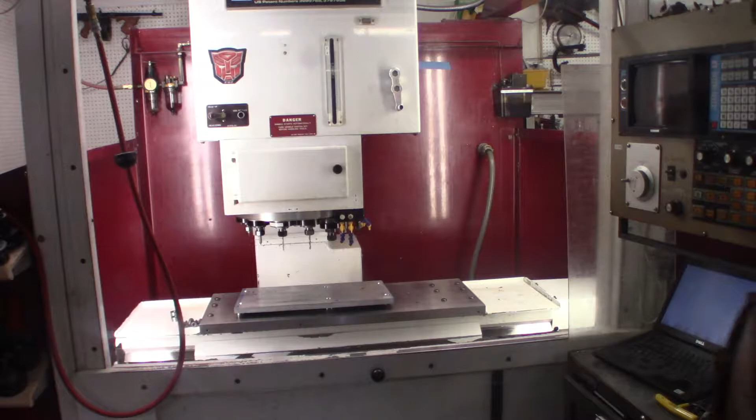Today I'm going to get started on a project that's really just something I've wanted to do to push my machining capabilities and skills. This is one of the tool holders for the Acroloc, and part of how it functions, there's a top ring, and then the actual tool holder is the rest of it. These rings, I've got somewhere around 15 or 16 of them total. 12 sit in the machine at all times, and the rest I swap out as I need them. What I'd like is significantly more of these rings, so that's what I'm going to try to build today. Let's head over to the bench and have a look.

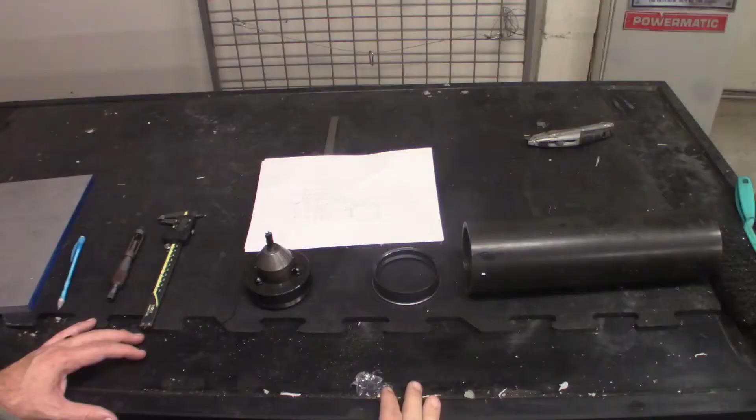Okay, so we've had at least a few days of mildly unpleasant warm weather, just getting a little over 100. The air conditioning in the shop has actually been doing enough that I'm not dripping sweat within 10 minutes. So I'm going to go ahead and start going over a project I've been wanting to do.

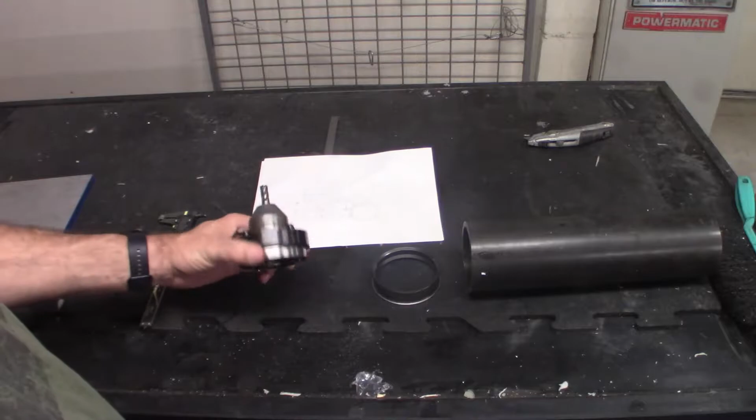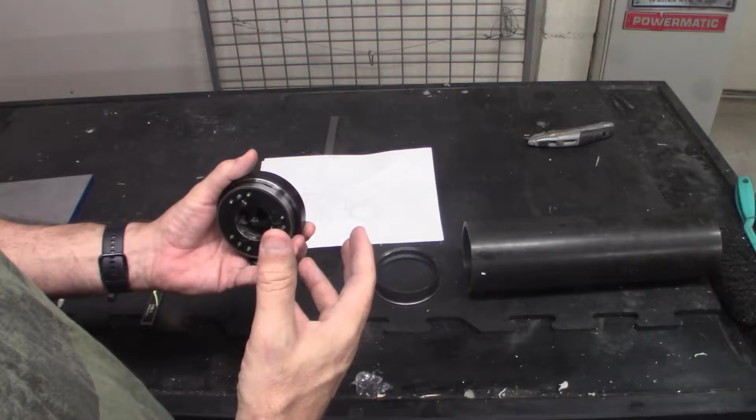So in the Acroloc, these are the tool holders. It's got its own custom tool holder, which has a lot of its own problems, but it's actually designed with the automatic tool changer in mind and the way they hold everything in. Each of the tool holders snaps into the spindle and comes down to do any of the cutting.

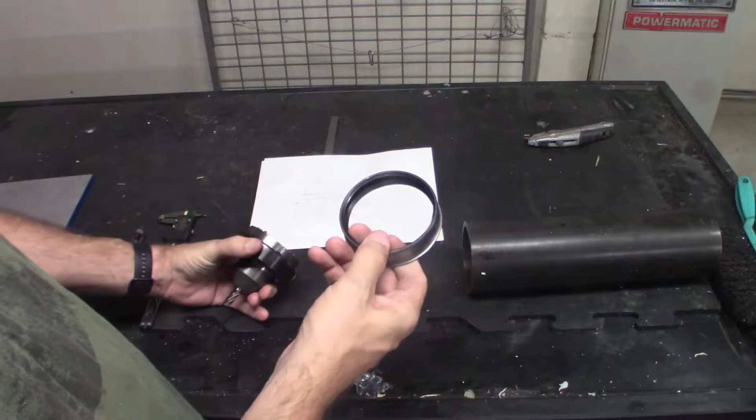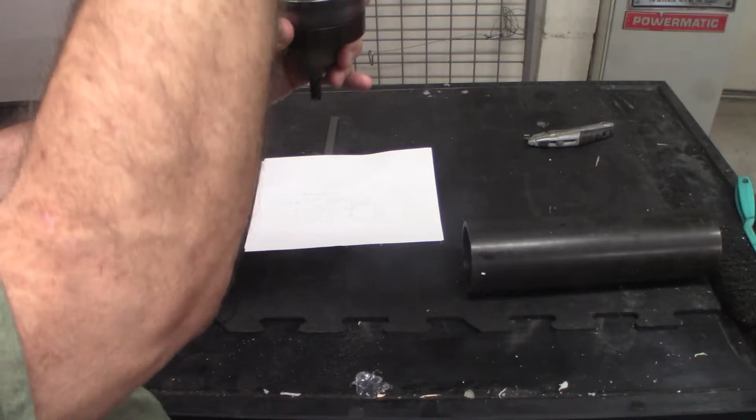So this piece is actually what holds it in the automatic tool changer as a ring, and it basically goes on here, and it has a little lip that holds it in so that the spindle can come down, hit it, and then it pops out, comes back up, pulls it off the spindle, and then it can change to the next one.

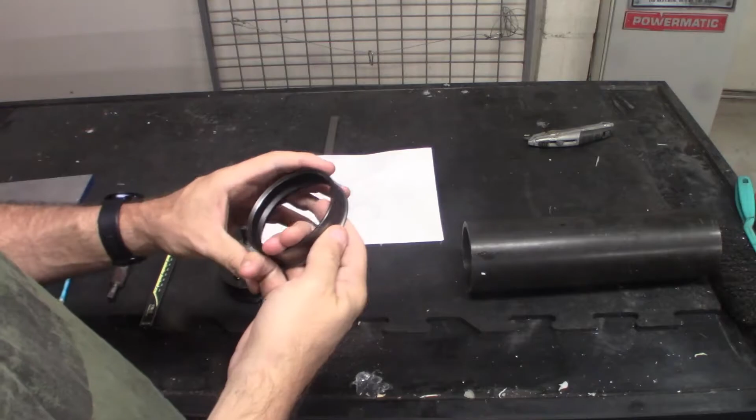So these rings, I do technically have enough of them, and as I need new tools I can pull them off. The tool changer has room for 12 tools. I have, I think, 15 or 16 of them, so I have a couple of extras I can swap out between tools, but they kind of look like an interesting project.

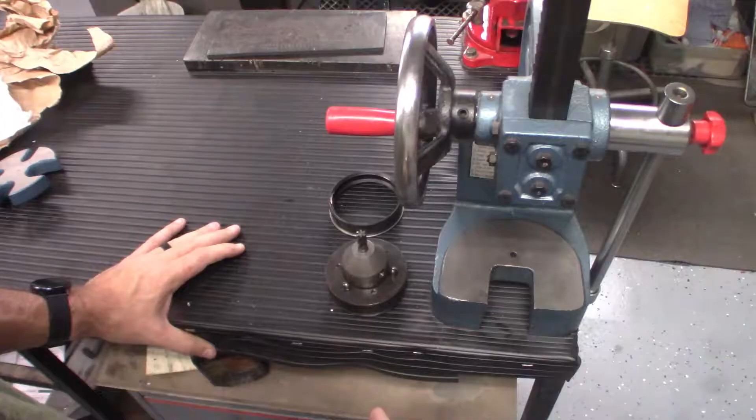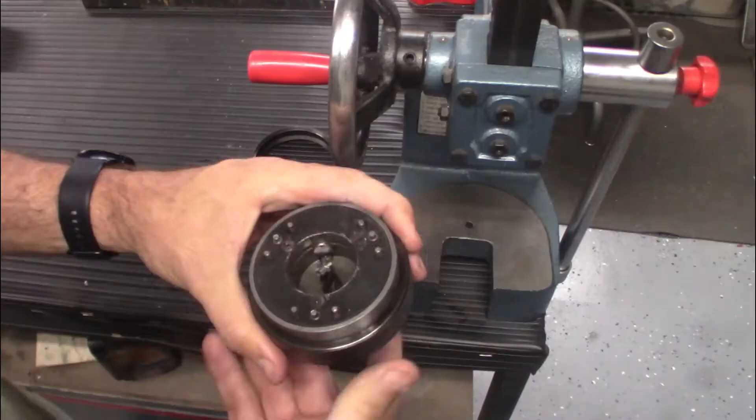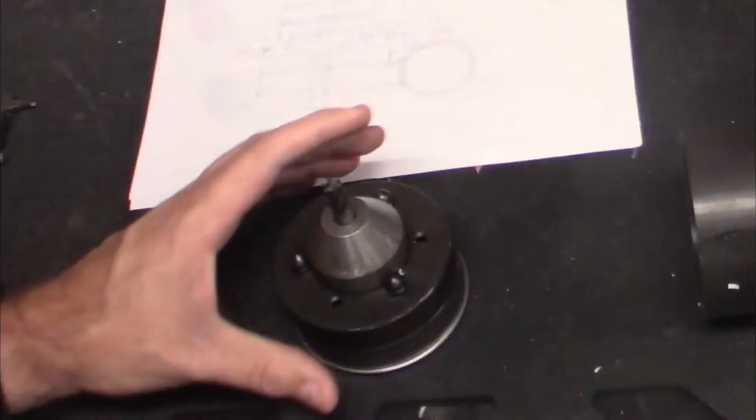So now, as you can see, the taper fitting in here is clear so the spindle can come down. Now these little pins here, what holds them back into place - now they're protruding into this ring and actually holding it. So if I put it in the tool changer, it will be able to basically suspend itself in place. Now back over here, to actually remove the ring, I come over to the other side.

I've got a rubber mat here so I can gently set it on the tool, and I'll mostly hold it with my hand, but I can come into these pins and press them down, and each of these will come out, and then the final one will release the spring tension that's on the main tool holder part, and then the whole piece comes out.

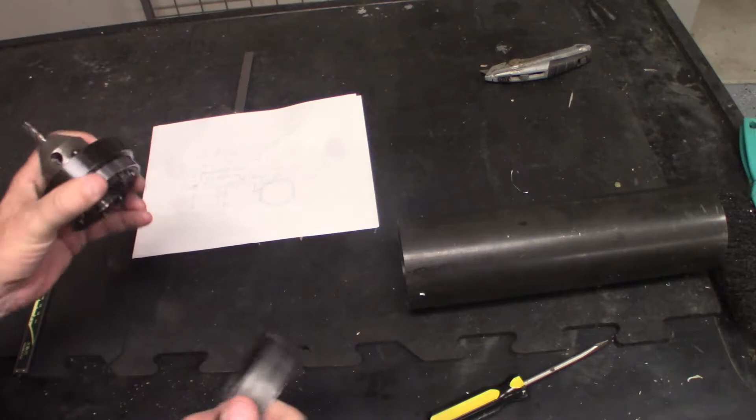So the most ideal would be that every tool holder like this that I own, which I've got a little over 100 of them, would have a ring, and that would make it the easiest. Whenever I need to pop in a new set of tools, I can just pull them out and drop them right in. I don't have to go through that process. Not that it's a difficult process, but any friction would make me try to substitute a different drill or a different end mill that can do the job, instead of the perfect end mill that's made to do the job.

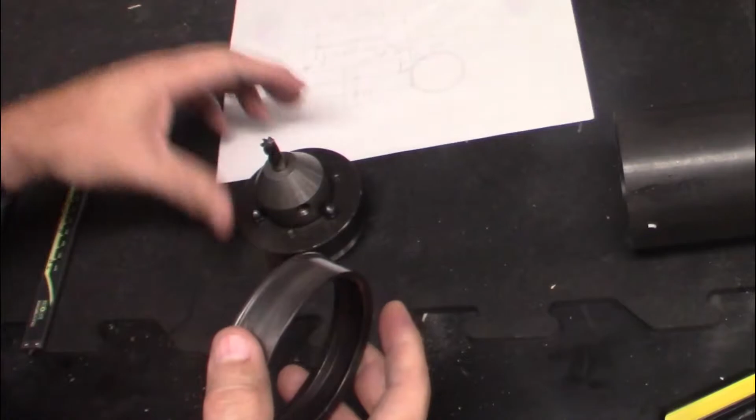And it seems like a fun project to actually try to make one of these. So I went through and measured all of the components, trying to figure out what the original dimensions and specifications would have been for this particular piece.

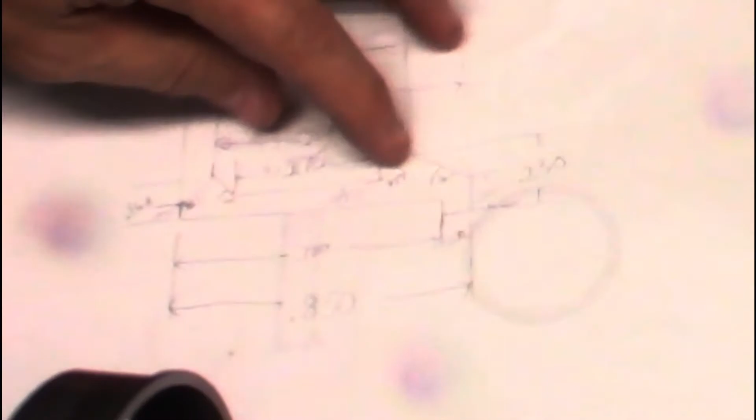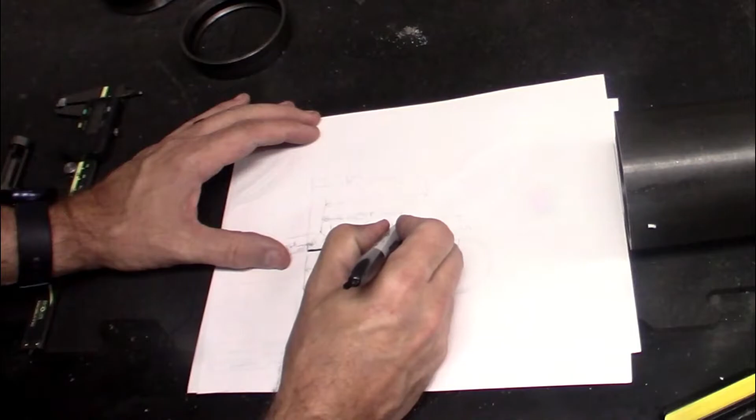And a lot of these measurements have been really difficult to figure out. So I found that this is a 30-degree angle going in this way, and each of these others are 45-degree angles on the insides here. The cross-section shape of this I have outlined here - it looks like that, so that would be if we were to take a cross section here.

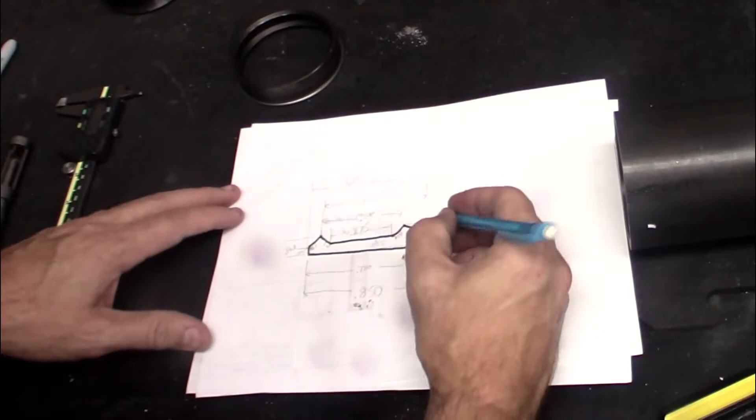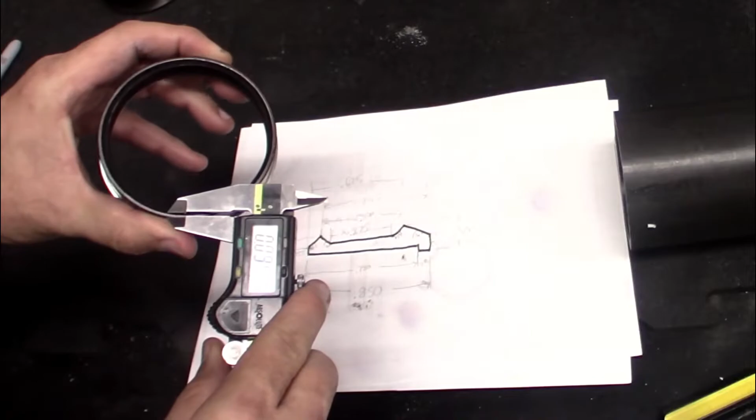So I've got specific measurements that I was able to get fairly precise. And a couple of these I gave my little tilde next to, as they were approximately how close I could get, but I wasn't necessarily able to measure them exactly. Some of them may be eyeball measurements, like figuring out about how big this here is supposed to be. Through the measurements I found it to be somewhere around 75 thousandths.

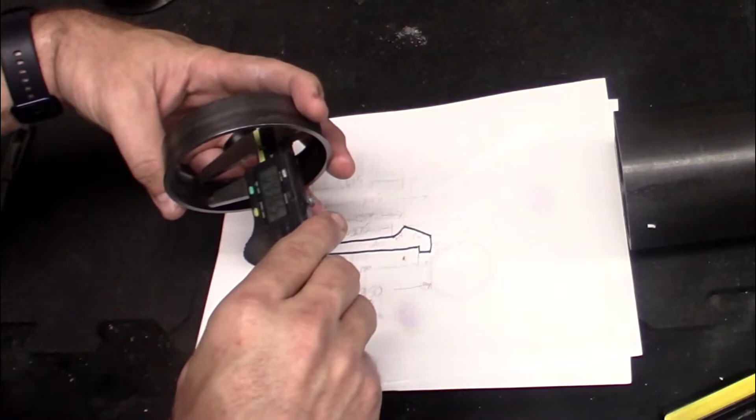These were the measurements I knew I could play with, probably within 10 thousandths, to try to get everything else. The bottom of this channel here, coming in this way, kind of estimating about where they're supposed to be. And then peak to peak, kind of doing the same thing, and I found that to be almost exactly a half inch. So I figured that was probably what the original intention was for those.

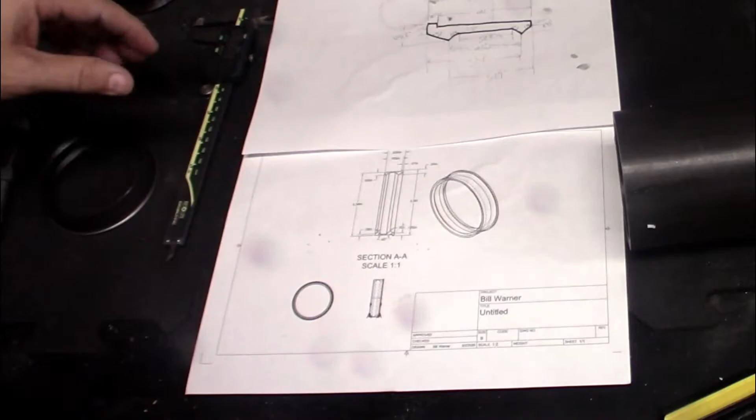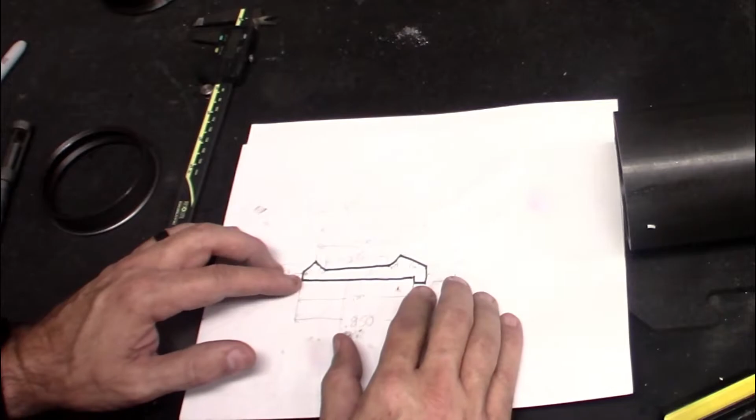So taking all of this and putting it into a sketch in Fusion, no matter what I did, I could not get these guys to come really even close. They were about 75 thousandths off of what they're supposed to be. Really, I don't even know where my errors in measurement were that would bring everything this far off, unless these 45 degrees are, ever so slightly, maybe 44 degrees or something.

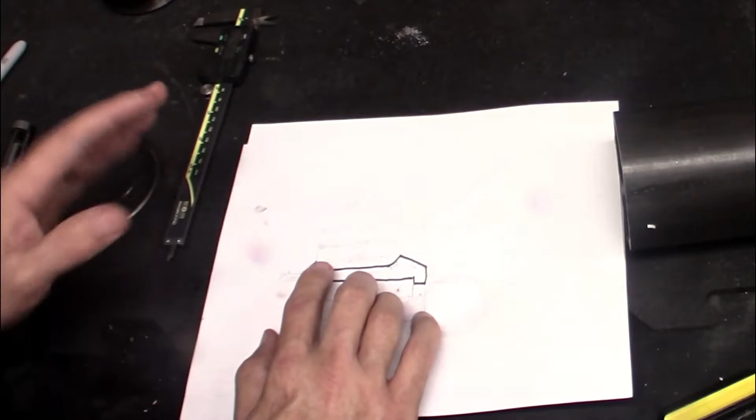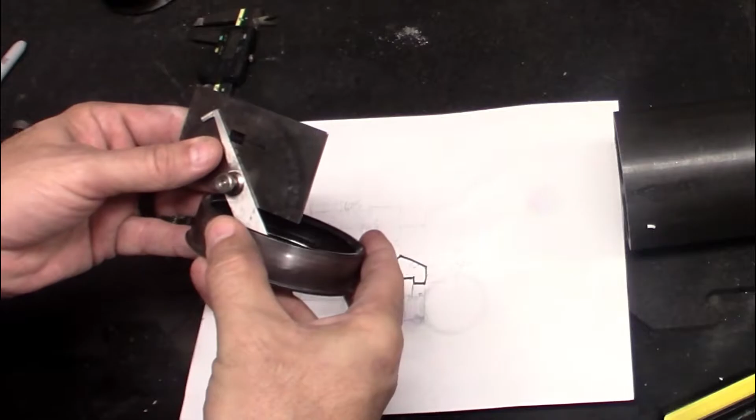But the only tool I have for actually measuring this particular angle is just a regular protractor, which gets me close. And because they are really close to 45 degrees, I would have kind of assumed that they likely were 45 degrees. But unless I have a better way to actually measure those, that's going to be kind of what my assumption is.

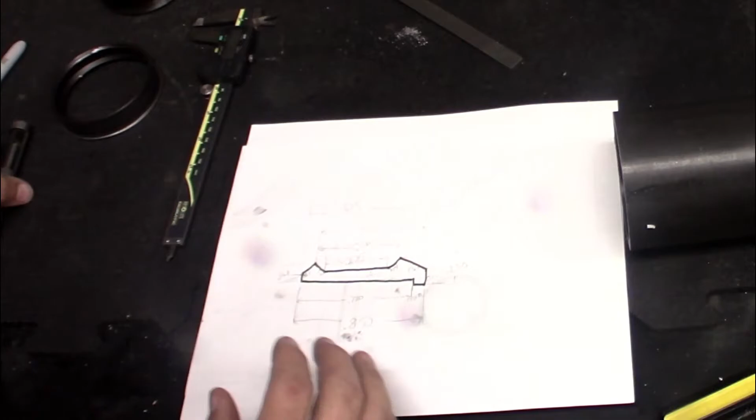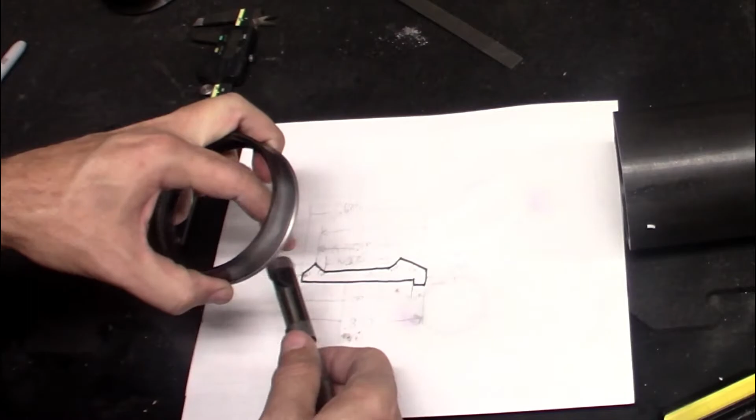So I picked up this micrometer, came in a toolbox, never really figured what I would actually be able to use it for, but it actually came in rather handy for getting this measurement from the bottom of this lip to that peak, and this measurement from here to here. It was helpful for getting in there and getting those measurements.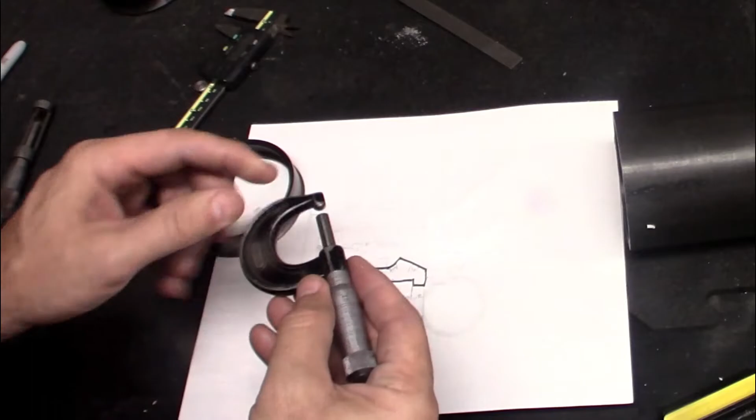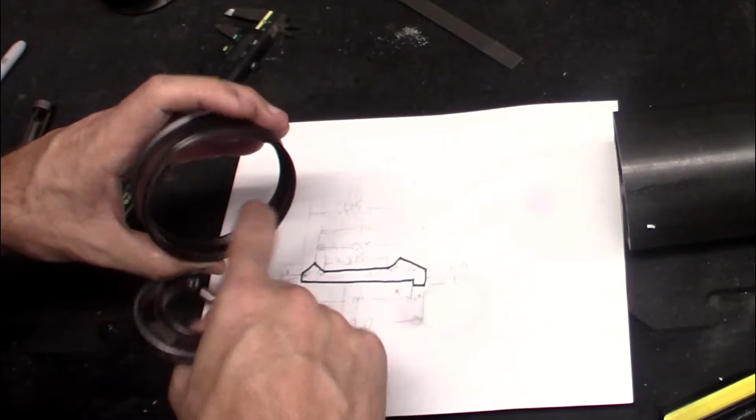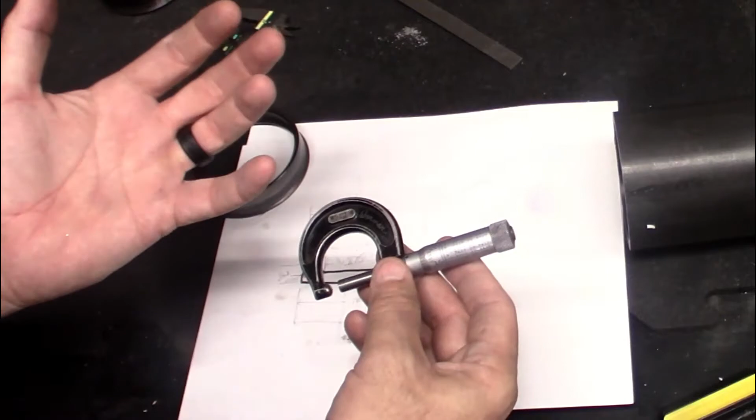I have this little domed anvil micrometer that I was able to use to get inside and measure the thickness of the inside of this valley, and came up with 55 thousandths. This was actually one of the few machinist tools that I had inherited from my father, he was a heavy equipment mechanic, and sometimes you needed to measure things, so he did have a couple of small measurement machinist tools.

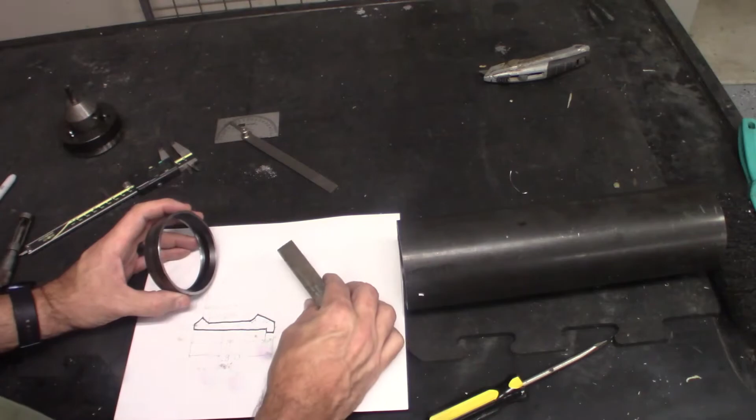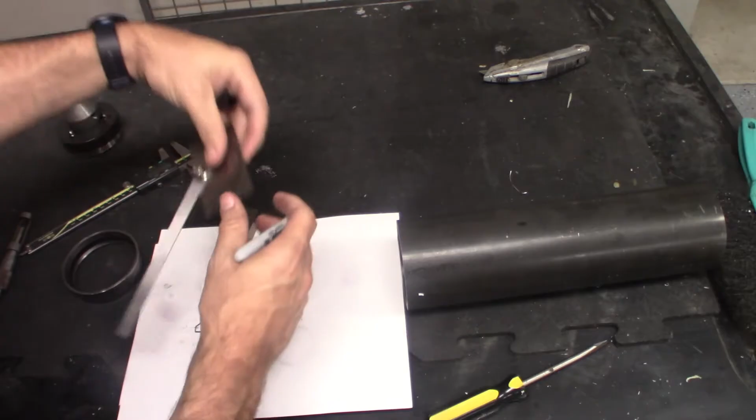So to get in here and actually cut that out, I've got a relatively large chunk of high-speed steel here, probably much larger than it really needed to be. But I'm actually going to come in and create a boring bar with the 45-degree profile trimmed out, something similar to all of that, which should give me a tool that I can use to come in and cut this channel.

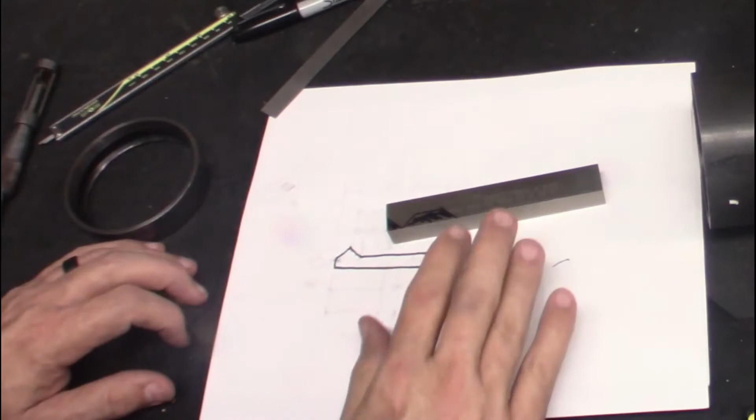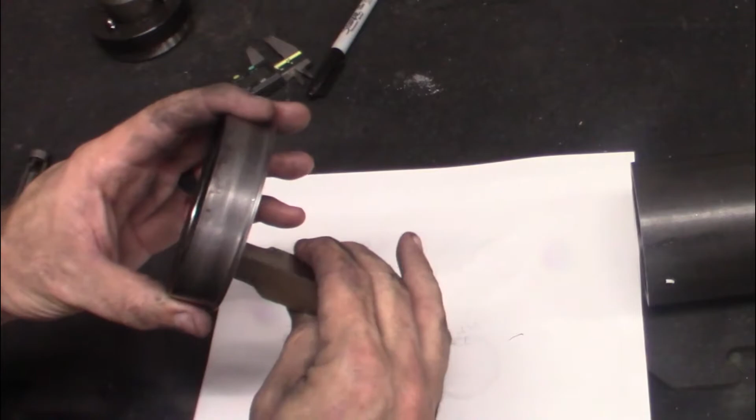So this will be something I actually get to use my tool and cutter grinder for. So far I did a quick rough job on the belt grinder just to kind of get my outline. I didn't go quite as deep as I had originally drawn because I don't think it really needs to be that deep, but this gives me the chance to come in and double check. Not sure if you can see, but I can definitely get in and reach all of that inside feature.

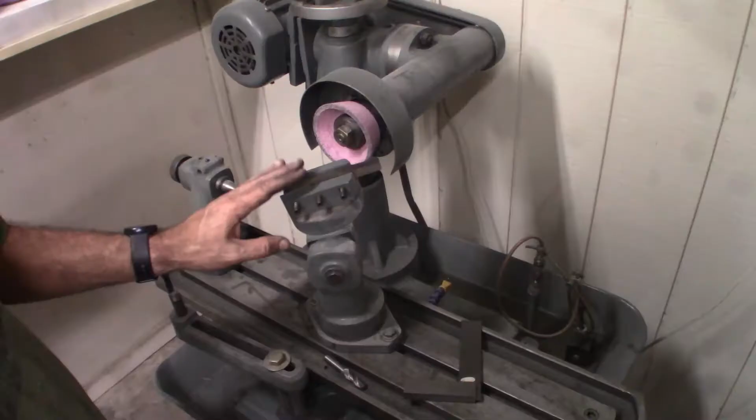So now I can take this and actually set it up on the T&C grinder and grind in those angles and get everything perfectly set up. Alright, my first setup on the T&C grinder, I've got my back relief of about 10 degrees and the actual cutter edge set at the 45 degrees. Just used a protractor up against that to make sure I was at the 45 degrees.

Now I just got to get suited up and ready to go. Actually, I got to get this guy plugged in first. I've got a new 3-phase tool that I've been working on and been borrowing this plug.

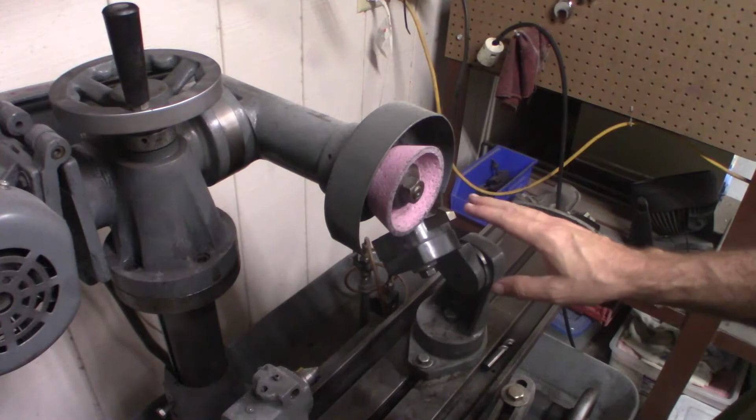Alright, so I've got my angle set up here at a 45. I'm not sure, I don't love this setup, but I think it should work. But I can just come in this way and bring that edge over.

So while cutting that, I actually just realized I'm cutting my relief angle the wrong direction. So I have this angled this way 10 degrees, it needs to be angled this way 10 degrees.

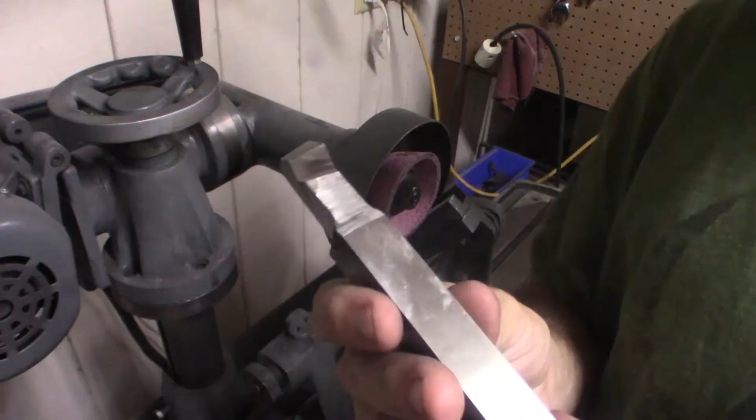Alright, now as you can see, I've got a really good 45-degree angle cutter with a neutral rake.

For steel, I better double check, so I think I should have a slight positive rake. Let me double check my lathe cutting book. Alright, I double checked, Little Machine Shop says for cutting most alloy steels you should have an 8 to 15 degree back rake.

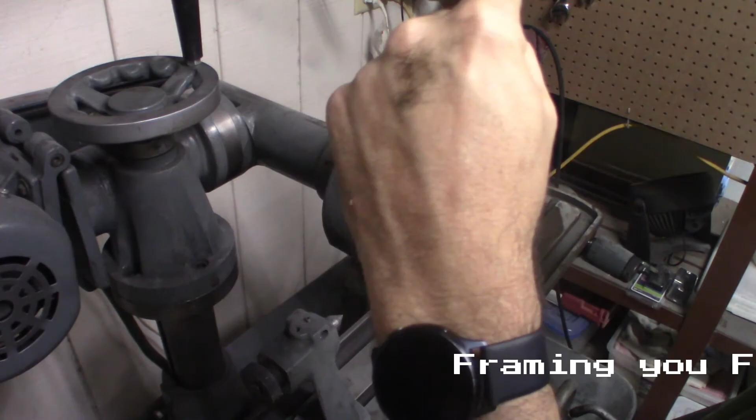So that's going to be going this direction here for this particular cutter, so we're going to go ahead and mount it in here and tilt it just a little bit. Alright, this isn't really the best setup, I should actually be using a regular wheel. I don't actually have a good regular wheel, all I have is this cup wheel, so we're going to use it and just go vertically this way.

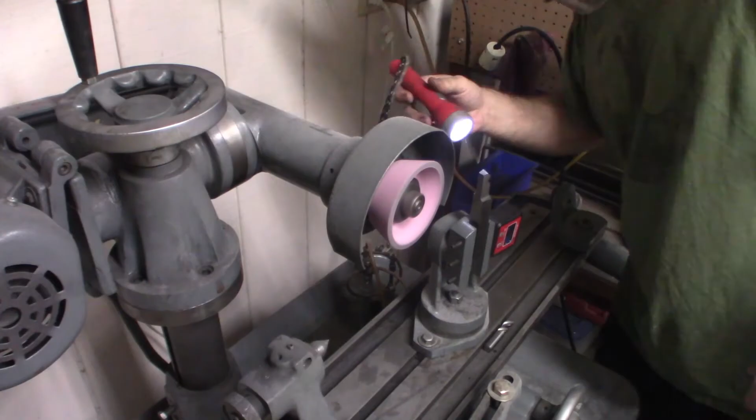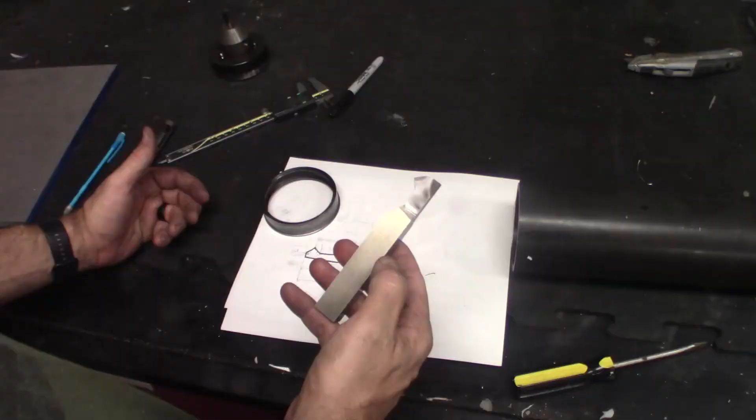Alright, so I spent a little bit of time with a stone and I got a nice sharp edge, and I just rounded off the tip just a little tiny bit. I think that this will actually get in here and allow me to cut this inside feature here. I think this is a good start.

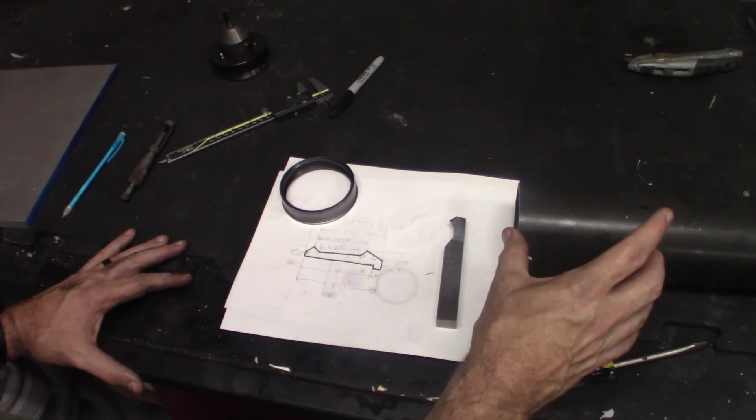The next video I will actually cut the stock. I'm not sure if halves or thirds. I want to make sure I have the right amount of stick out so that I don't get too much chatter, and we'll start giving one of these a try, see if we can make one.